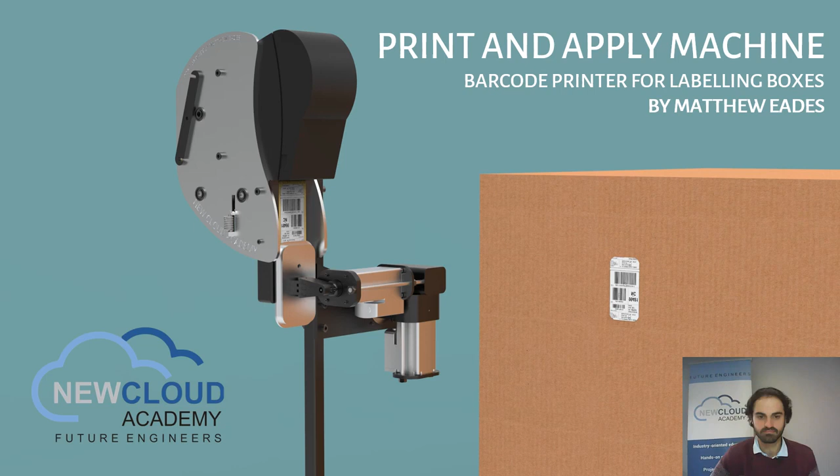Hi there, my name is Matthew Eades and I'm going to be presenting to you today the second version of the print and apply machine.

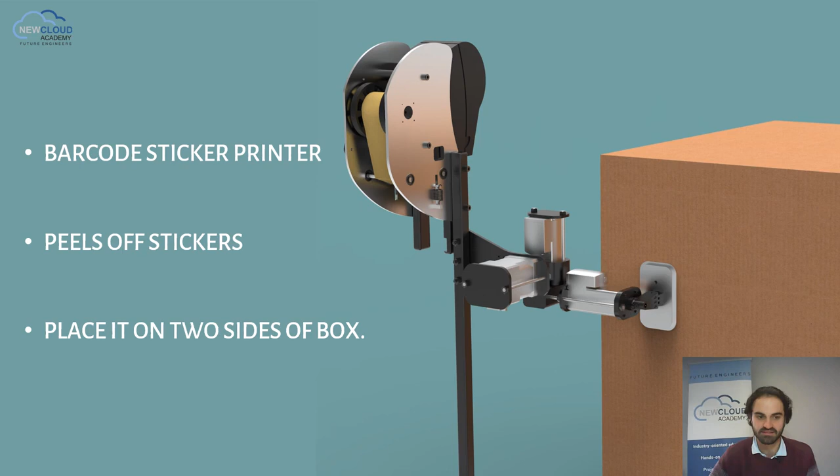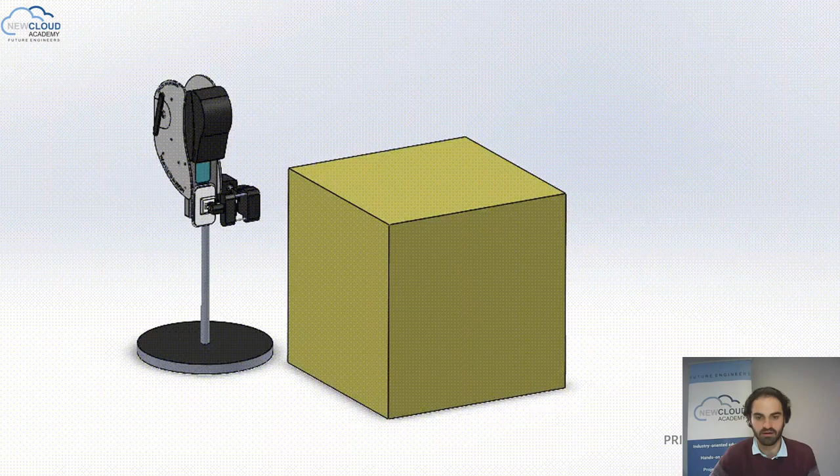This machine prints out barcode stickers, peels them off and places them on two sides of a box. This is how the machine works: it picks up the first sticker, places it on one side of the box, then goes back, picks up the next, and goes to the next side. Then a new box comes along a conveyor system and the process is repeated.

The problem statement: to design and build an affordable, efficient and reliable print and apply machine that places a printed barcode sticker on two sides of a box. This machine will be suitable for all types of companies that need accurate labeling, as well as speeding up the production process.

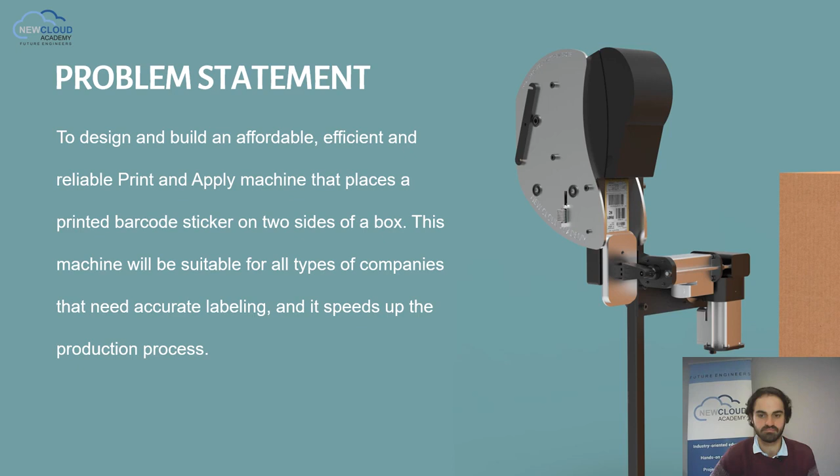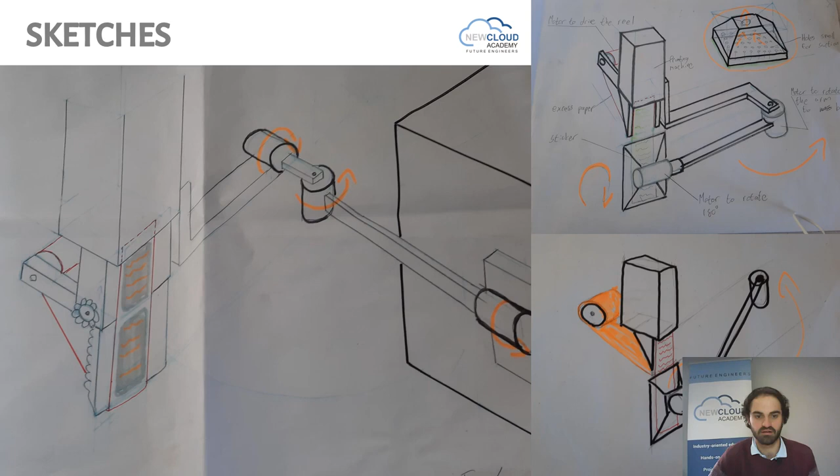First, on version 1, I started off doing some sketches after Vainan from Automation Works briefed me on making a print and apply machine. During these sketches I learned a lot about how the mechanics of this project was going to work, figuring out how the arm was going to rotate around each axis to be able to get to the box.

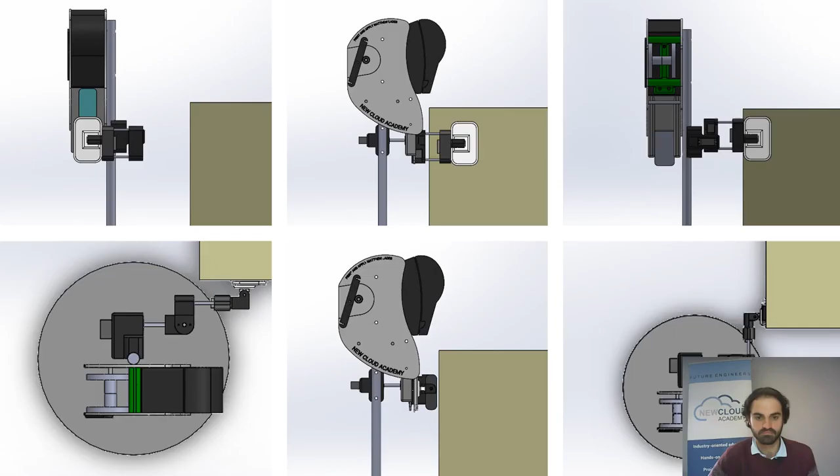I then moved to SolidWorks, where I created my first model just to understand more about the mechanics and how the product was going to work. I carried on in SolidWorks, spending a lot of time developing and finalizing the first version of the print and apply machine. I then manufactured all these parts and built the first version.

After creating the first version, I can now conclude that the first prototype was very successful in helping me understand how the mechanics of the machine were going to work, as well as understand how the arm was going to move from the printer to both sides of the box with no interference, and how I was going to peel the sticker off the sticker backing.

Festo has also indicated that this project has the potential to go to the next level if all the small issues regarding the servo, power, and weight distribution can be resolved.

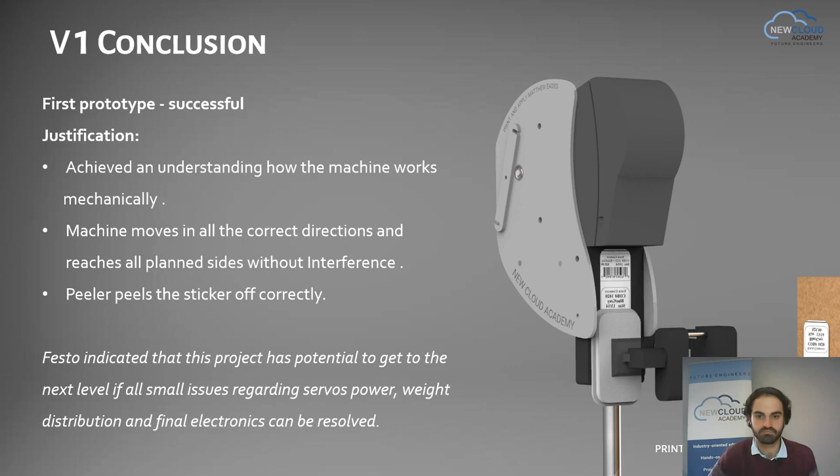I'm going to need to use a lot more industrial motors, such as the Festo range. These motors will be able to provide a lot more torque as well as accuracy, and will also be able to last in the industry.

I then need to investigate the center of gravity of the arm. In the first prototype, the arm didn't connect at the midpoints, meaning the motor needed to produce a lot more torque to get the arm rotating. The pneumatic control system of the sticker placement also needs to be looked at to get that fully operational, as well as I need to look at replacing the Arduino with a more industrial controller.

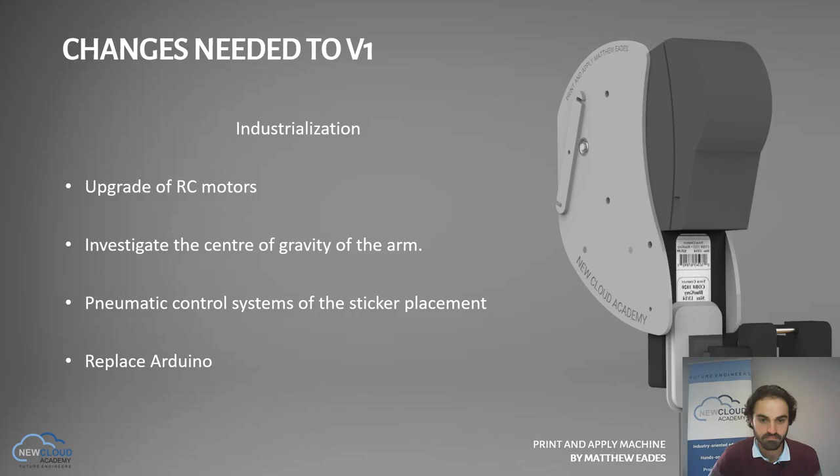This here is the second version of the print and apply machine, and straight away you can see that it's a lot more industrial with the materials I've used, such as aluminium. As you can see, it's built in a way that it looks like it's going to last a lot longer, and you can see all the small things I've added to the product to finalize version 2. I spent lots of time on SolidWorks figuring out where all the little screws, bearings, springs and other components were going to go, and how this machine was finally going to work.

These are the necessary changes I had made. I redesigned the reel system, and now the system has a spring loader which allows the sticker backing, the excess material, to stay taut while it winds up on the reel.

I've also redesigned the center of gravity of this arm to make sure that the arm connects at the midpoints, allowing the motors to require less torque, as well as adding limit switches in the necessary places to help know when the machine is at its home position, and once the stickers hit the box. I wouldn't want the box being knocked over by the arm, or anything in the box being broken, so that's why I've added limit switches there.

I've also designed and built this in a way that all the parts will finally be able to be manufactured in aluminium, as that is a nice strong and light material that I can use for the arm.

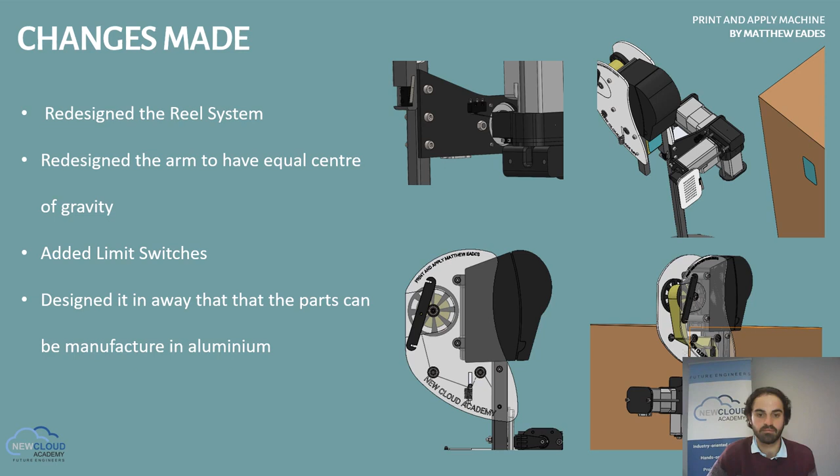A big part of this project was upgrading the electronics and figuring out what industrial components I can use to get this product up and running. The main thing was looking at the Siemens logo PLC. This is the controller I'm going to use to get this product up and running.

Then I'm going to be using 3 of the Festo motor drivers, 2 smaller Festo stepper motors, as well as 1 larger stepper motor, as one motion required a bit more torque. Then I'm going to be looking at the Festo pneumatic solenoid valves, as well as a Festo pneumatic-to-vacuum generator, which will allow the suction to happen.

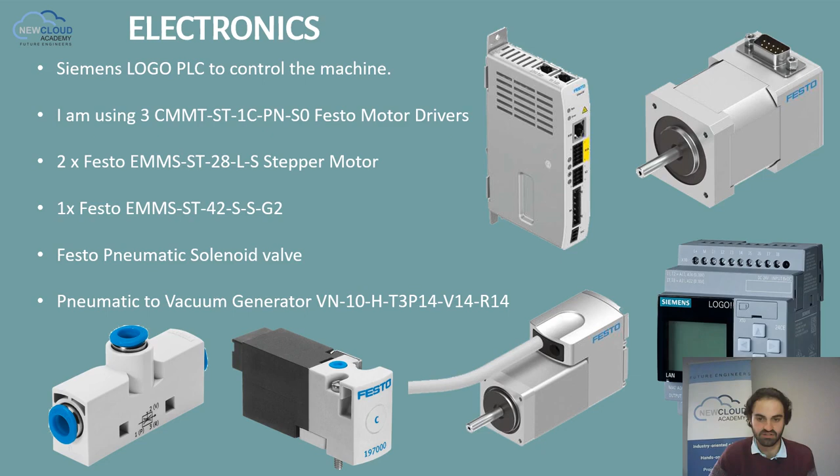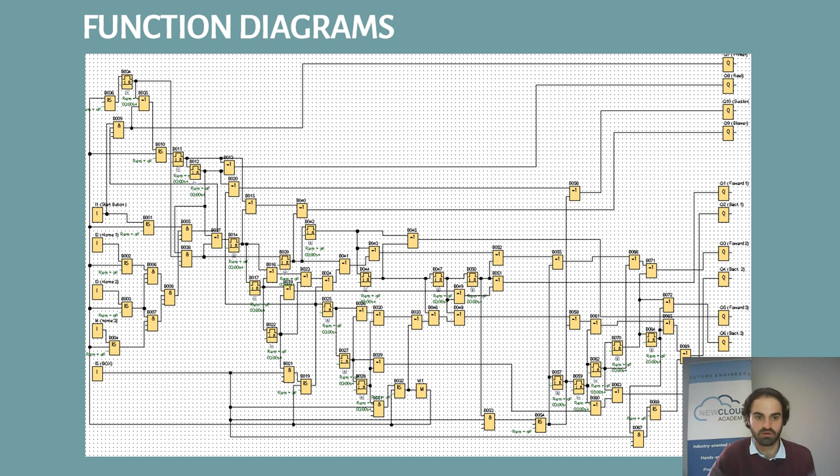This is the function diagrams that I created to get the PLC logo up and running. I did this on a program called Soft Comfort, which allowed me to lay out how my product was going to work, using many time delays and different functions to get each component up and running at the right times. This is a more simplified version explaining how the whole machine works.

As you can see on the top, the print function starts, and this is where the reels and printer start printing the sticker, the reels turn on, and the suction plate picks up the first sticker. Then below that, this function is all the motors required to start working to place the sticker in the first position. Then it goes back to its home position where the second sticker is printed.

Below are all the motors required to get to the second sticker placement before placing the sticker. Once the sticker is placed, it goes back to its home position, and then a new box or pallet can come along the conveyor belt, and the whole process repeats again.

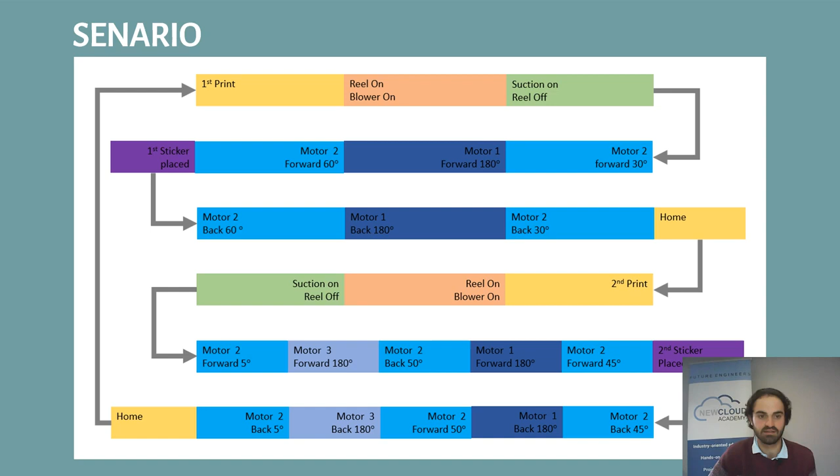So what still needs to be done to get this product up and running? I'm still awaiting the Festo motors and drivers to get the electronics up and running. I still need to look at manufacturing the parts, using Perspex as a material that will replicate the aluminium I'll use as the final material. I need to get the printer to communicate with the PLC, as well as finalize some of the pneumatic systems I'm going to be using.

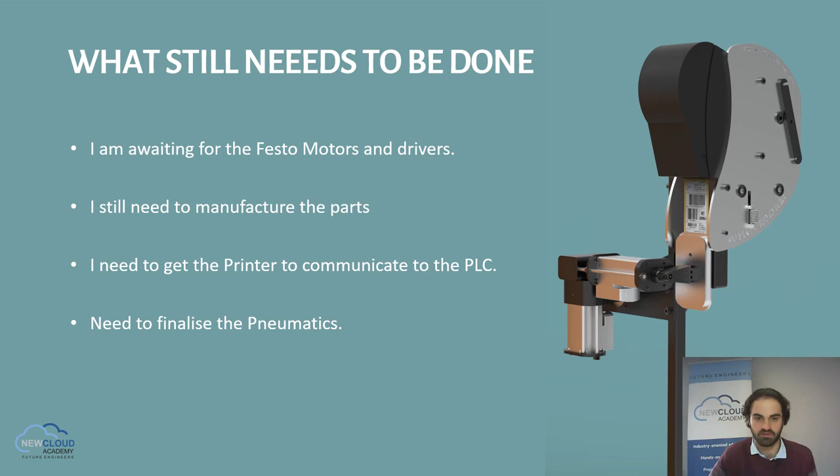The industrial advantages: this project has the potential to be a fully working industrial print and apply machine. It will help with organization of pallets and boxes in warehouses, and it will be more accurate than human application, minimizing human error. A nice thing about this product is that it can easily be scaled up or down depending on the application.

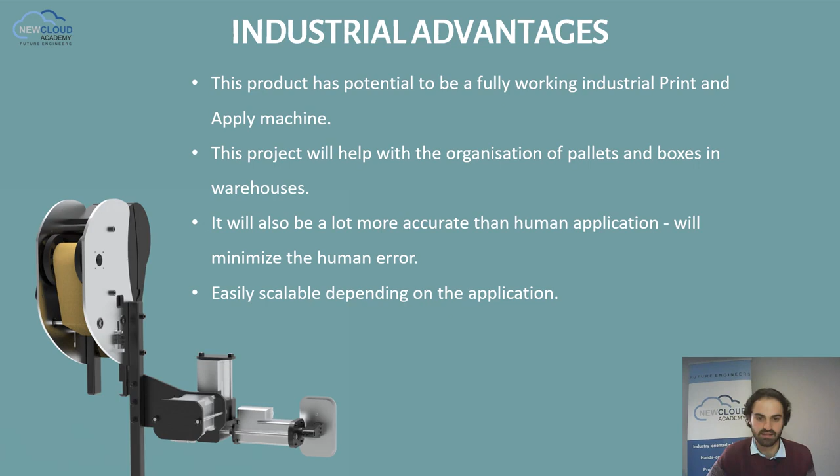Some of the skills I learned along the way: the biggest was being able to program and control the PLC logo. I made use of the Soft Comfort program to lay out the function block diagrams, and this program was really nice as it had a great simulation tool which allowed me to simulate each scenario I built up.

Another big thing I learned this term was the industrial automation of things, changing from less of a prototype to more of an industrial application and product.

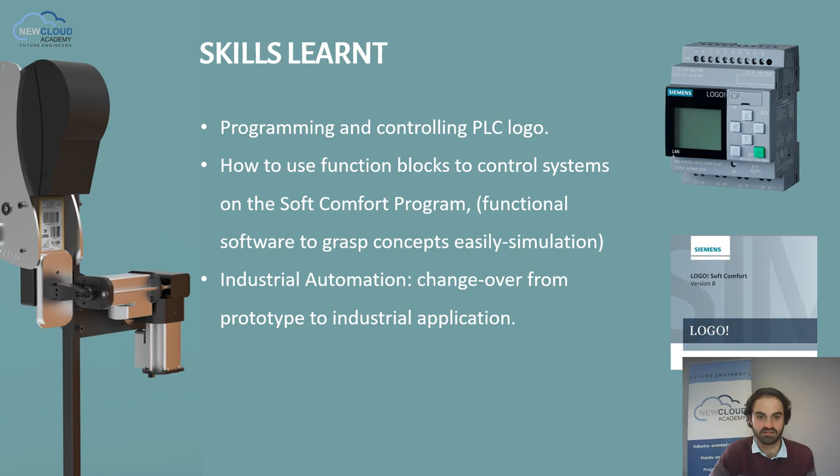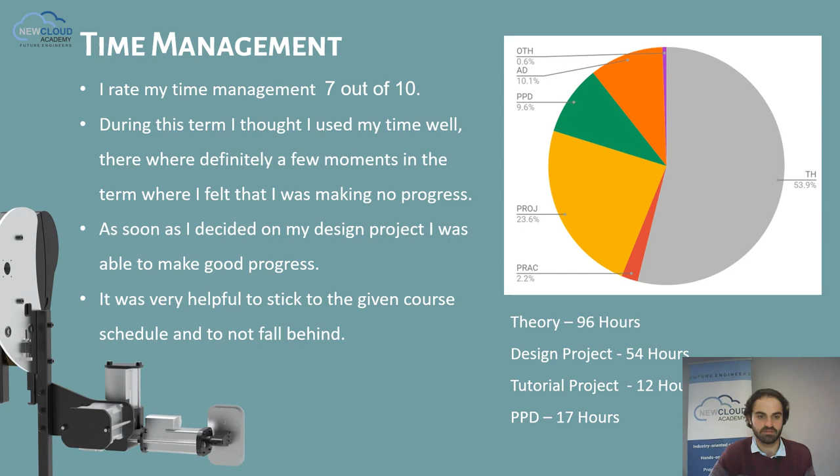This term was very heavily based on theory, as I did 96 hours on theory, learning the PLC as well as some electrical theory behind it. The design project took me roughly 54 hours to design. The tutorial project was 12 hours, where I put together some Festo simulations and got them up and running, as well as PPD, personal professional development, which we spent 17 hours doing this term.

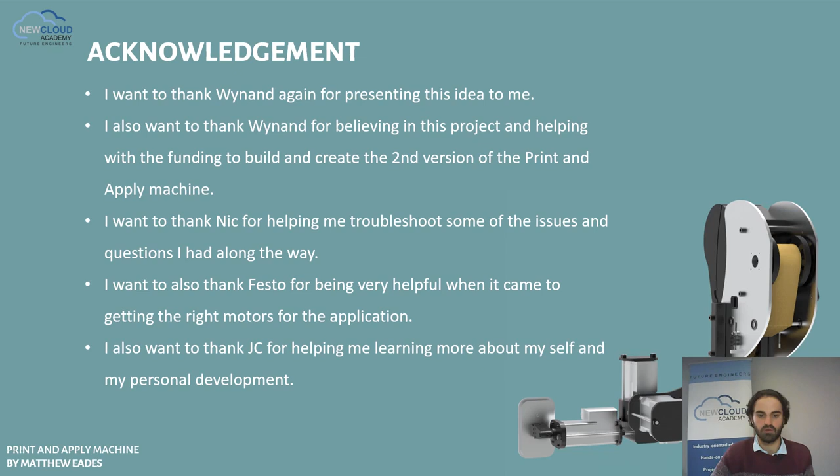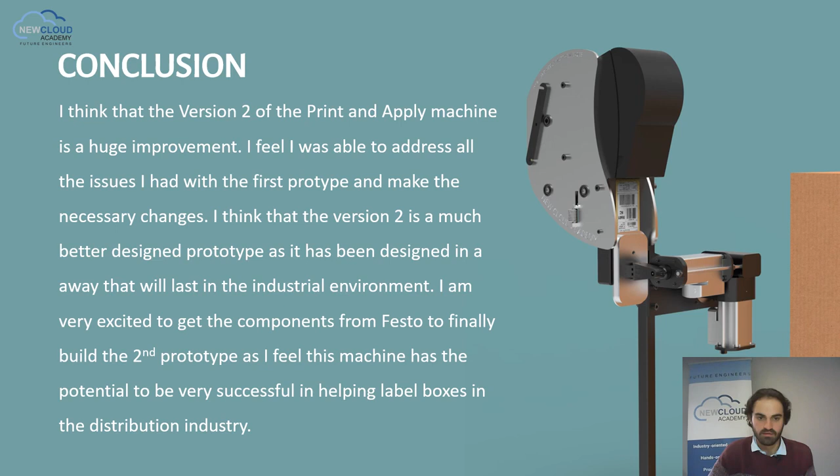This here is the second version of the print and apply machine. I can't wait to get it built. Thank you guys for listening.